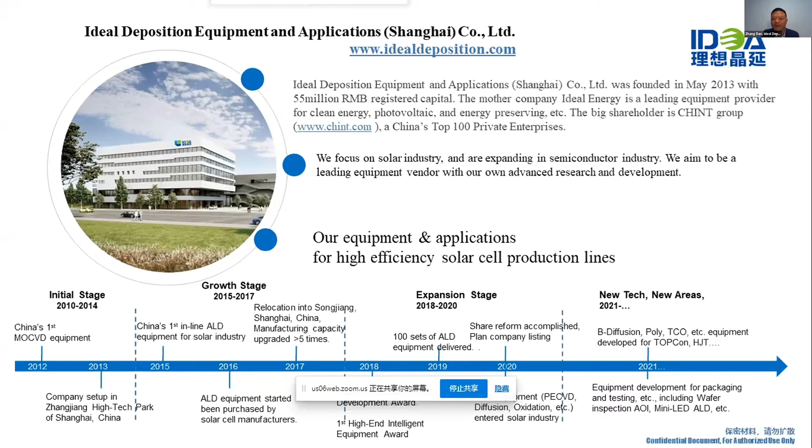We have quite a few industries equipment, for example packaging, graphene, IC chip. But today we will focus on solar business. Our ALD, PECVD, diffusion, oxidation, polysilicon, TCO, etc. equipment are built and can be customized for all kinds of solar technologies, including PERC, TOPCon, etc. We are also doing equipment development in HJT, perovskite, etc. technology.

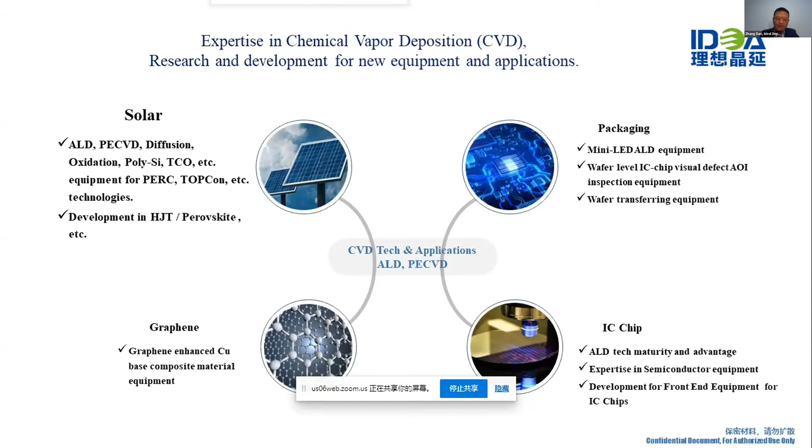As all of you guys, and I think many experts in this conference, you all know that solar cell efficiency is improving a lot every year. Nowadays, PERC solar cell mass production already achieved more than 23% efficiency. And you know that mass production's higher solar cell efficiency requires better equipment to do the mass production.

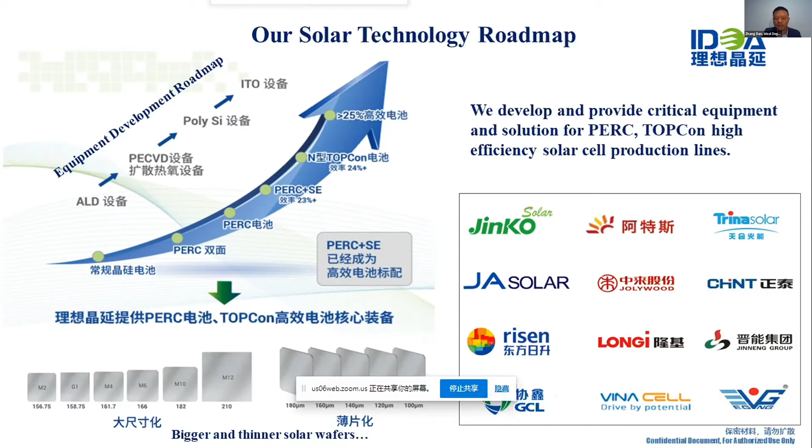Here is our equipment portfolio for solar business. For PERC and TOPCon solar cell production, we provide diffusion equipment for both phosphorus diffusion or boron diffusion. We also make inline ALD equipment for aluminum oxide deposition. We built PECVD for silicon nitride deposition and polysilicon of the TOPCon process.

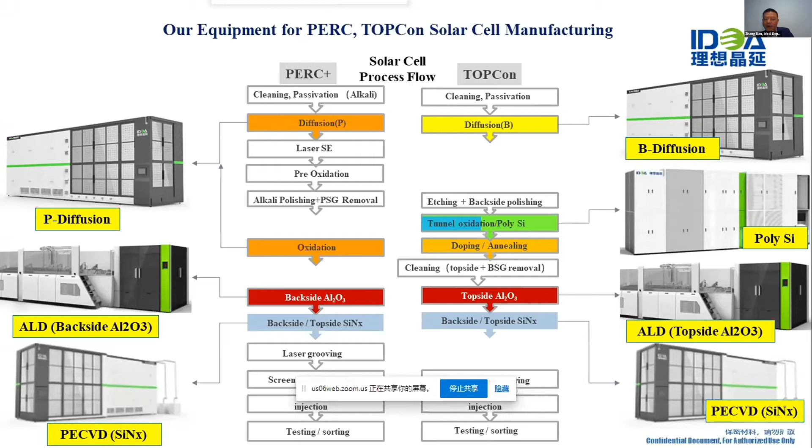From 2015, we built China's first inline ALD equipment. We have developed 4 generations of ALD equipment, and our ALD equipment got the Shanghai Science and Technology Progress Awards in 2019. These awards from Shanghai did prove that we had spent so many years in technology development. Till now, we have already got more than 170 sets of ALD equipment installed in solar cell manufacturing fabs.

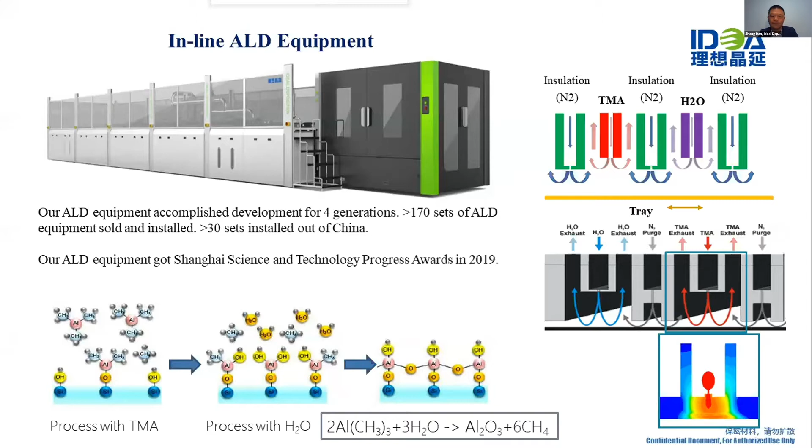As you can see from this data, our inline ALD equipment has a very high throughput. For 182 wafers, we can make 14,500 pieces per hour. For 210 wafers, our throughput is 10,500 pieces per hour.

During mass production, some of our customers ask for a thicker aluminum oxide film, because some customers found out a thicker aluminum oxide film can help make the solar cell higher efficiency and more optimize the process for some PERC solar cells. Especially, a thicker aluminum oxide film is helpful for TOPCon solar cells.

Sometimes even customers ask for a 10 nanometer thick aluminum oxide film. When the aluminum oxide film thickness is increased from 3 nanometers to 10 nanometers, our ALD throughput would keep the same and won't be reduced. So for this point, I want to say that during mass production, we are very flexible for customers' special process needs, especially when some customer asks for a thicker aluminum oxide film.

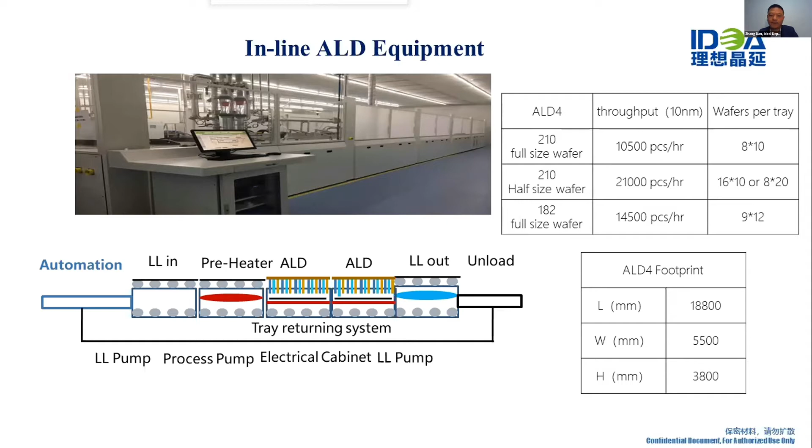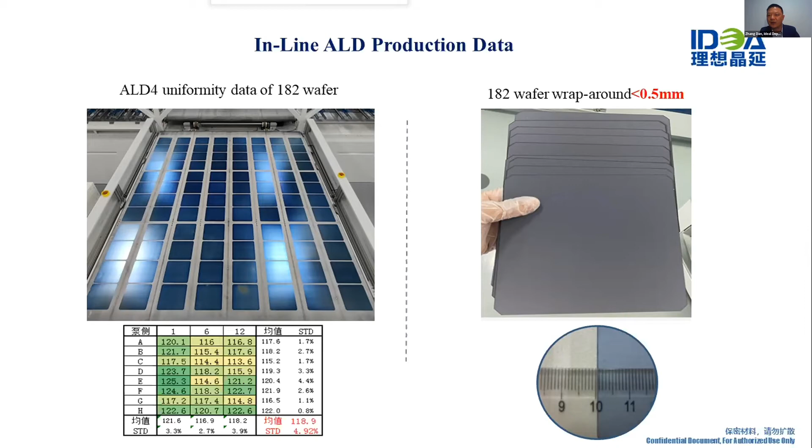And for that, you can see that for the top side emitter passivation of N-type TOPCon solar cells, there are more critical requirements for film growth and passivation. And it is very important to be without wraparound. This is very critical for TOPCon solar cells.

Our TOPCon customers are very happy with our ALD because we are doing very well without wraparound. By the way, PERC solar cell mass production also doesn't like wraparound. Besides our free-of-wraparound advantage, our inline ALD also has other advantages, for example, low wafer breakage rate for big size, thin wafers, and half-size wafers, etc.

Nowadays, a few customers are trying to do 210 half-size wafer production with our ALD equipment. For your information, our inline ALD equipment throughput won't be reduced by this half-size wafer production.

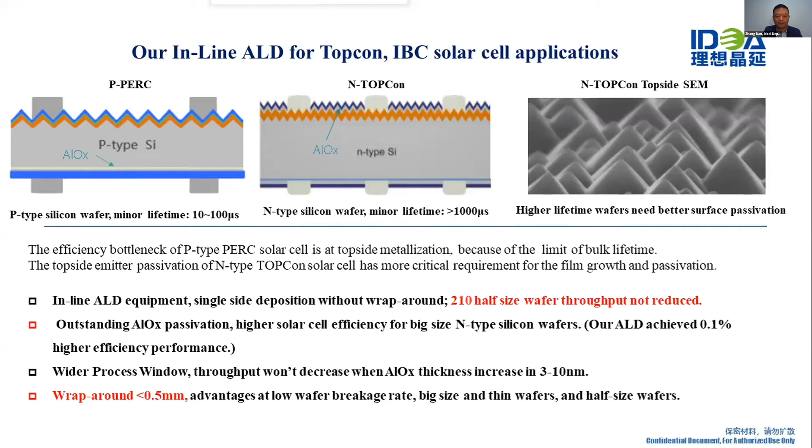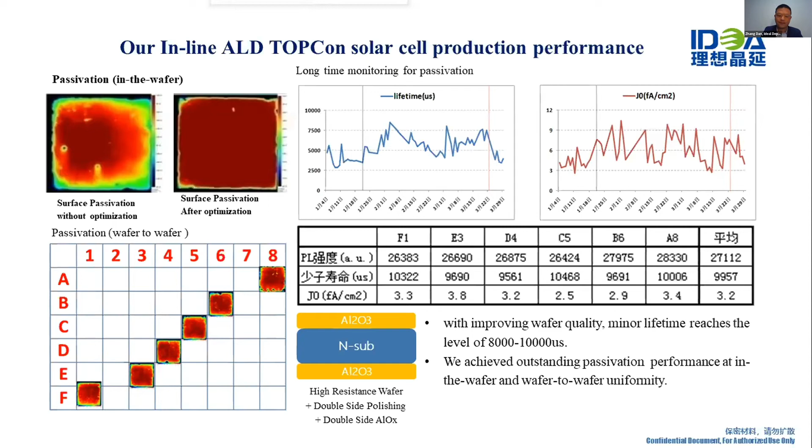Okay, so let's go to our high throughput oxidation and annealing equipment. This throughput is very high: for 182 wafer throughput is 19,200 pieces per hour. For 210 wafer, we can produce 16,800 pieces per hour. This means 1 gigawatt 182 PERC production only needs 0.9 sets of equipment, while 1 gigawatt 210 PERC manufacturing lines only needs 0.8 sets of equipment.

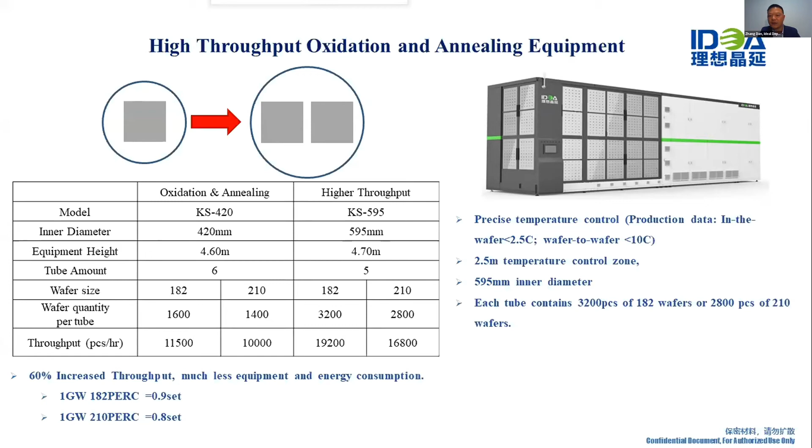Our fast furnace diffusion equipment also has very high throughput: 10,500 pieces per hour for 182 wafers, while 8,400 pieces per hour for 210 wafers. Each 1 gigawatt 182 PERC needs 1.7 sets of equipment, and 1 gigawatt 210 PERC only needs 1.5 sets of equipment.

For this diffusion equipment, we also have other advantages: multi-gas flow distribution and control, precise temperature control, a 2.5 meter long temperature control zone, and 595 millimeter inner diameter. Each tube contains 3,200 pieces of 182 wafers, or 2,800 pieces of 210 wafers.

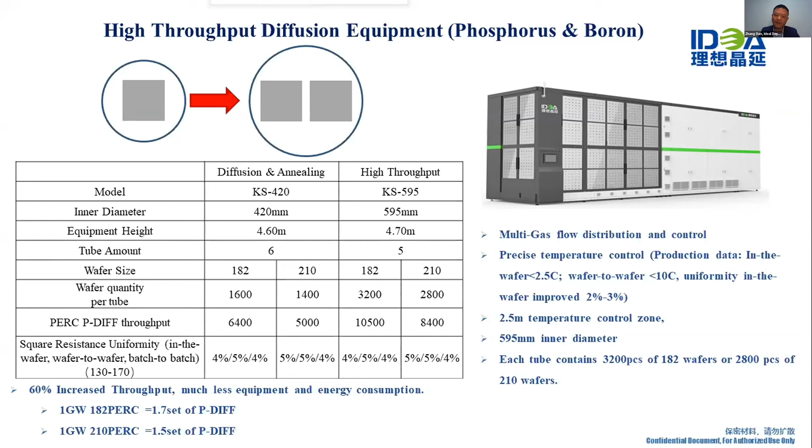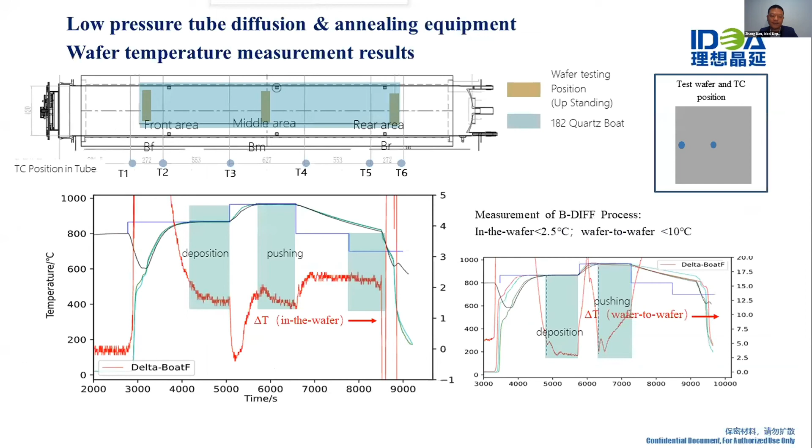These are the wafer temperature measurement results. It shows that our temperature control is very precise. And our diffusion equipment has effectively improved square resistance uniformity by using multi-gas flow control.

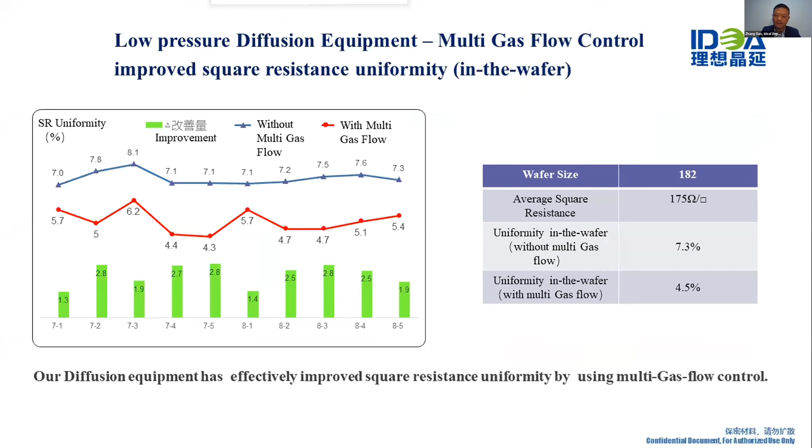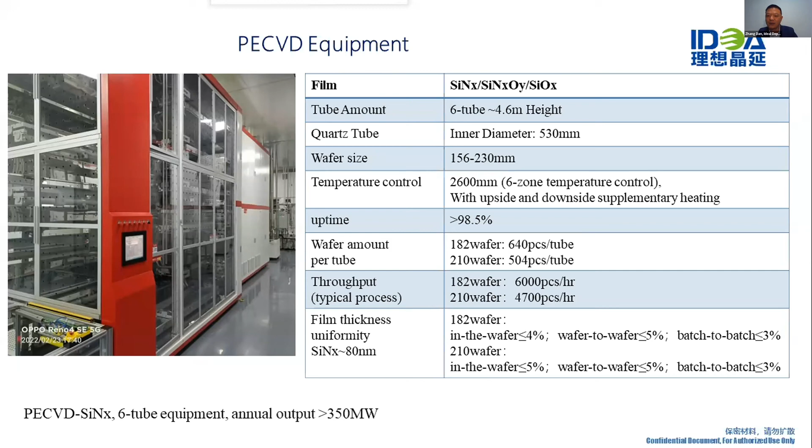Well, let me make a short summary here. Our inline ALD is single-side deposition without wraparound. Because of outstanding passivation performance, our ALD achieved minority carrier lifetime of 8 to 10 milliseconds and more than 0.1% higher efficiency at TOPCon solar cell production, and is very well suited for PERC, IBC, and other technologies. Because our ALD is an inline machine, it is better adapted to bigger wafer sizes and thinner wafers, with much less wafer breakage rate and a wider process window.

We also have very high throughput and very well temperature-controlled tube equipment, such as diffusion, oxidation, and PECVD equipment, etc.

Our equipment and services have earned respect and repeated purchase orders from our overseas solar customers. More than 50 sets of our solar cell equipment have been installed overseas since 2018. We will be happy to work with our overseas customers to support you to succeed in your solar cell production.